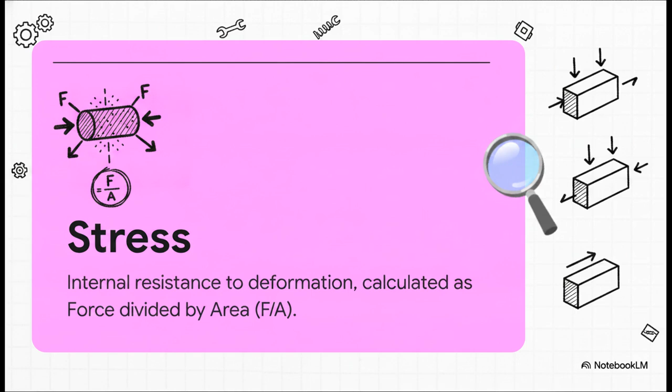You want to explain it practically. Stress is the invisible internal resistance a material feels when an external load is applied. Think about it this way: if you apply a 100 kilonewton tensile force to a circular rod, the stress is that exact force distributed across the rod's cross-sectional area. It's the internal burden the material is bearing.

Right on the heels of that, they're probably going to ask you about strain. Strain measures the actual physical deformation that results from that stress. If stress is the invisible internal resistance, strain is the visible physical consequence. It's calculated as the change in length divided by the original length. So in an interview, when you're asked the difference between the two, remember this golden rule: stress is the cause, and strain is the effect.

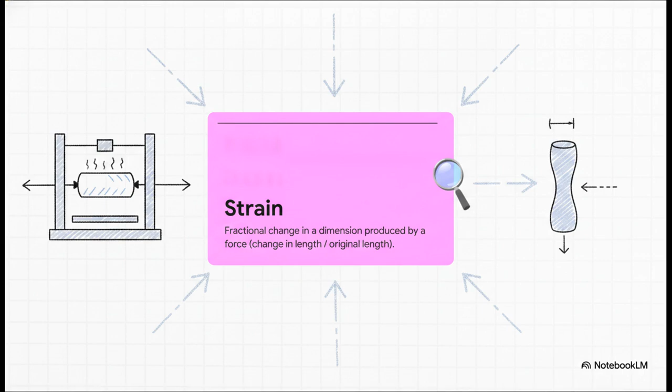Now, let's talk about material memory. Does a material bounce back elastically, or does it permanently yield and become plastic? Elasticity simply means the material acts like a spring; remove the load, and it snaps right back to its exact original dimensions. But if you push past the yield point, you enter plasticity, which means permanent deformation.

And here's a fun fact to drop in an interview: while you usually want operational parts strictly in the elastic region, automotive engineers actually use the plastic region intentionally when designing crumple zones to absorb crash energy.

Here's a classic interview scenario they love to throw at you: why would you choose mild steel over cast iron? Well, the answer lies in ductility versus brittleness. Ductile materials give you a warning; they stretch and deform visibly before they snap. Brittle materials, like cast iron, absorb very little energy before failing suddenly and catastrophically.

So you'd use a ductile steel for an automotive suspension arm that might take a hit, and brittle cast iron when you need extreme rigidity, like for a heavy machine base.

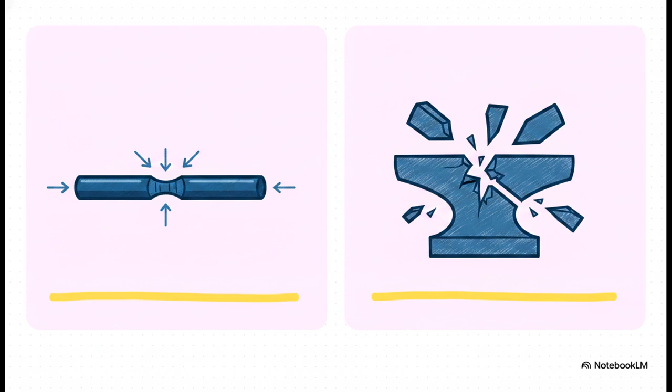All right, moving right along to Section 2, Essential Engineering Technical Skills, the tool belt. So, when an interviewer hits you with the classic 'Tell me about yourself,' what they actually want to know is how you synthesize these core technical pillars.

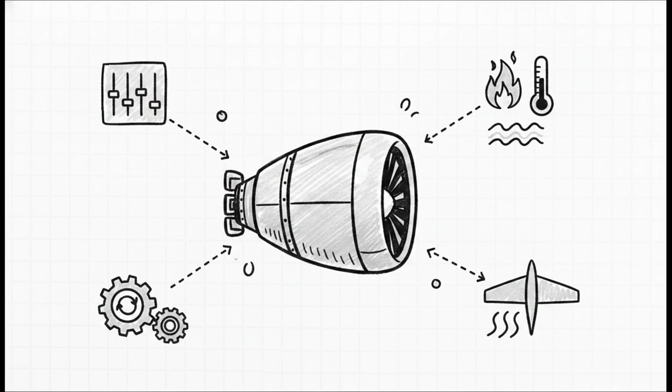A strong candidate understands how solid mechanics, fluid dynamics, and thermodynamics interact. For example, if you're designing a jet engine, you need thermodynamics for the combustion, fluid mechanics for the airflow, and solid mechanics so your turbine blades don't shear off. You want to structure your answers around how you've combined these exact skills on your actual projects.

To predict how things will fail before they are ever built, you need to bring up industry-standard finite element analysis, or FEA. We don't just rely on hand calculations in the industry anymore. We use powerful tools like ANSYS or Abaqus to mesh a CAD model and simulate exactly where stress concentrations will occur. Highlighting your hands-on experience with these tools proves to an employer that you can validate designs digitally, which literally saves them thousands of dollars on physical prototypes.

You can design the most perfect part in the world, but if you can't communicate how to manufacture it economically, your design is pretty much useless. This brings us to Design for Manufacturing, or DFM.

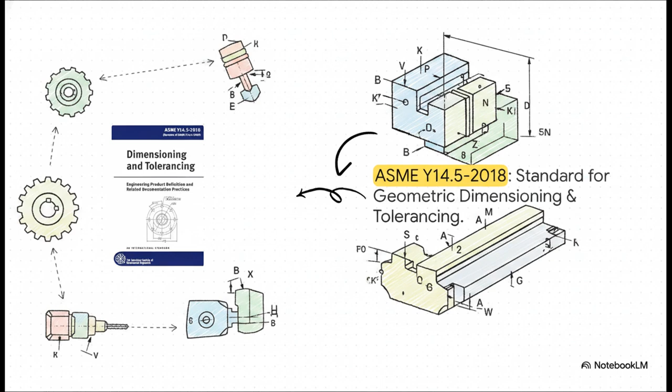To do this properly, we use the ASME Y14.5 standard for geometric dimensioning and tolerancing. GD&T is literally the universal language of engineering drawings. It gets us away from basic plus-minus tolerancing and lets us precisely control the form, profile, orientation, and location of a feature.

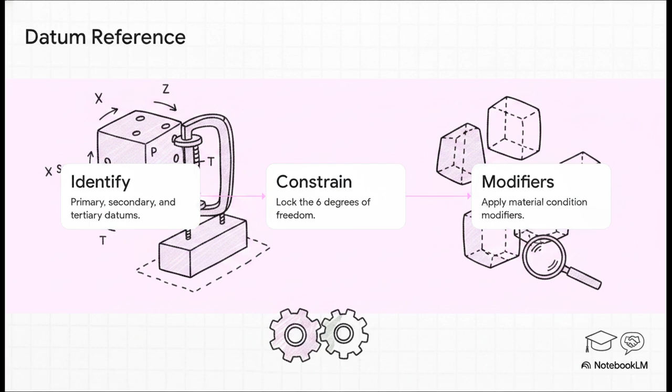A highly technical interview might ask you to step through how to set up a datum reference frame. This is a very precise procedure that locks your physical part into a theoretical 3D space by constraining all 6 degrees of freedom. First, you identify your primary, secondary, and tertiary datum features, like a flat mating surface or a mounting hole. Then, you apply modifiers like maximum material condition to ensure parts actually fit together on the assembly line. Know your datums inside and out.

Section 3, Diverse Industry Career Pathways, the Application. Let's look at where you can take all this knowledge.

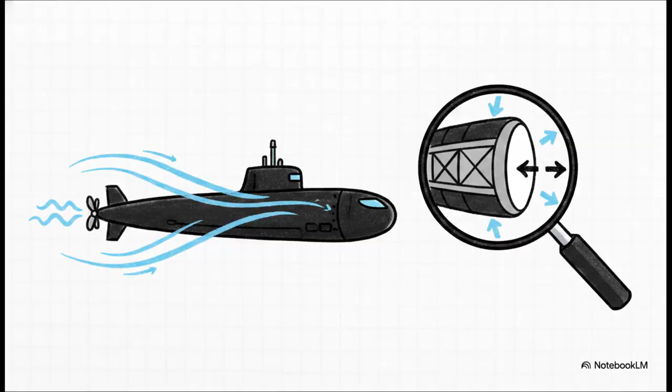Let's say you're interviewing in marine engineering. Out there, you are fighting a relentless battle against a harsh, highly corrosive environment. You have to ensure structural integrity under massive ocean pressure while optimizing fluid flow for propulsion. Whether you're aiming to be a naval architect or a marine systems engineer, the ocean is going to test your mastery of flow dynamics and material science every single day.

Or maybe you're looking at health and biomedical engineering. This field is absolutely fascinating because it's where biomechanics meets incredibly strict regulatory compliance. You aren't just designing a simple mechanical hinge, you are designing a prosthetic knee that must endure millions of fatigue loading cycles without failing, all while being perfectly biocompatible. In this industry, the human body is the ultimate design constraint.

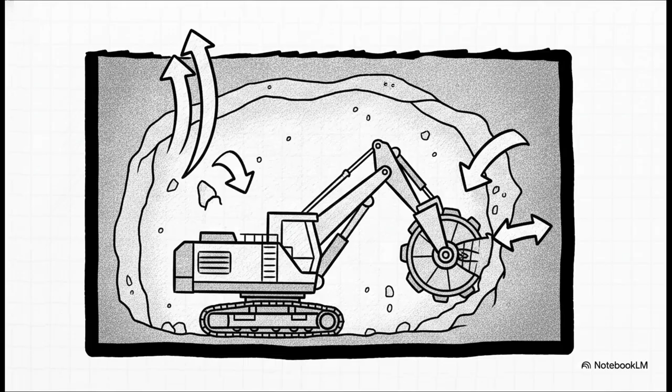And if heavy industry is more your speed, mining engineering relies heavily on mechanical engineers to safely optimize massive extraction machinery and complex ventilation systems. Here, you are dealing with extreme load cases, heavy machinery design, and hardcore thermodynamics for deep underground ventilation. The scale is massive, the stakes are very high, and ensuring safe, sustainable extraction requires top-tier mechanical optimization skills.

A factor of safety is simply the ratio of a material's failure strength to its allowable stress. We never design exactly at the failure limit, we over-engineer to account for unknowns. So when management pushes for a shortcut, a professional engineer holds the line and relies on that math to guarantee a safe product. Interviewers love to see this mindset.

To build that technical intuition before and after the interview, you need to tap into the engineering community. You don't have to solve everything in total isolation. If you've got a highly technical stress calculation question, Engineering Stack Exchange is deeply analytical.

If you need career advice or interview tips, the Mechanical Engineering subreddit has over 400,000 members ready to help out. And if you are dealing with complex codes, Eng-Tips is packed with licensed professional engineers who have literally seen it all.

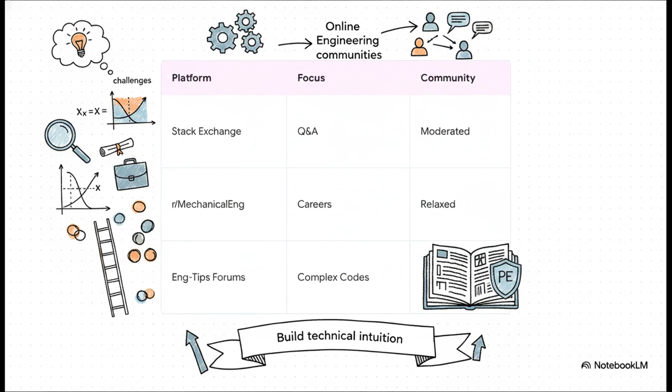I'll leave you with this scenario to chew on for your next interview. When management demands a shorter timeline, will you compromise on design or will you protect the user? Remember, your technical skills get you the job, but your professional resolve is what defines your legacy.

When you're answering these questions, don't just memorize definitions. Connect your answers to real applications, use concrete examples, and always explain your thought process out loud.